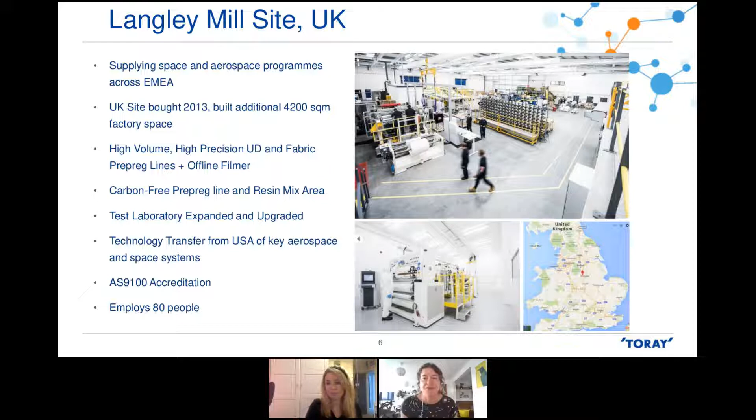We've now got everything that we need to supply into the industry, and we're actively supplying space programs across Europe. On spacecraft, we're the structure, and we supply raw materials to manufacture these parts. So solar array panel substrates, reflectors, there's a huge list here of parts which we supply, but basically with composites, you can get about a third weight saving over metallic parts.

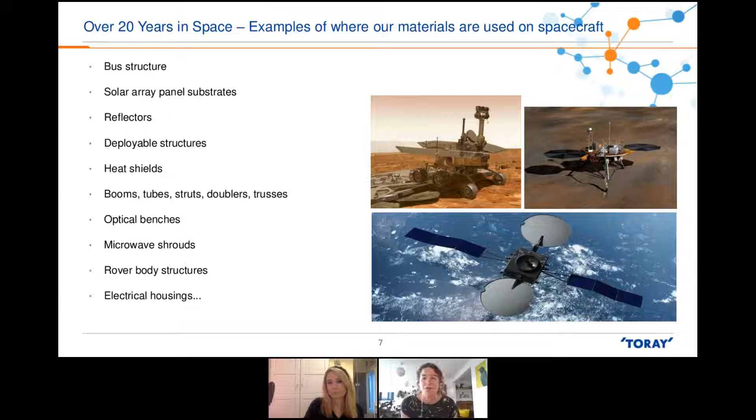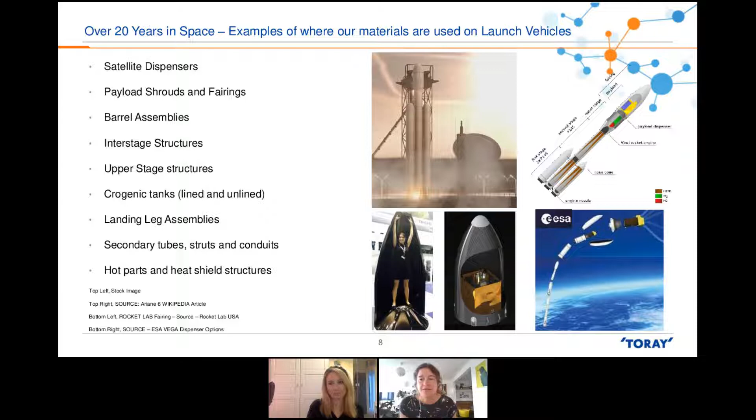And here are some examples of where we're used on launch vehicles, including a picture of me inside the Rocket Lab fairing. Their latest vehicle is substantially larger - I think they put a picture of themselves having dinner in it on their Twitter feed. So again, we're seeing growth in this area in small launch vehicles, and we're supplying to all the structural elements of these, including tanks for fuel like oxygen.

So what are the challenges of getting to space? Well, it's very high cost per kilo. As a rough value, it costs you about $10,000 US per kilo to get to geostationary orbit. On the small launch vehicles, they're still at a higher cost than the large launch vehicles, and they're going closer to the Earth, so to get to low Earth orbit costs you about $30,000 per kilogram. So you can see a weight saving is really worth it, even with quite exotic, expensive materials.

The biggest load that these materials ever see is on launch. Huge acoustic and vibrational loads generated on launch. Excepting, of course, if they're going to land on other planets, that's a whole other set of loads. And then you get temperature shocks, for example, when you're filling the fuel tanks on Earth. Once you're on orbit, you've got vacuum, you've got radiation, and more we're seeing requests for materials that are resistant to atomic oxygen, which is basically oxygen escaping from the Earth's atmosphere.

It's far more prevalent in low Earth orbit because you're closer to the Earth's atmosphere. There are also temperature extremes in space as you're going in and out of the sun's shadow, and it depends how far away you're going from the sun with your mission. So there's thermal management, of course, no convection because there's no air to help you there.

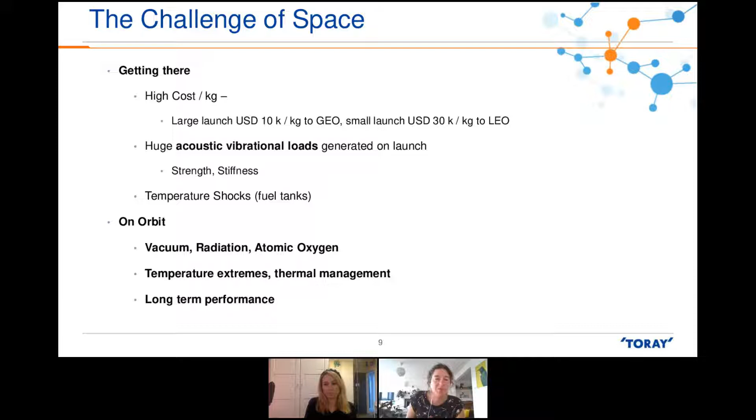And you want long-term performance. So for a geostationary orbit satellite, you're looking at performance for 15 years in space without a failure. So you really want to know that you've got a good material up there.

Which is of the solar array panel substrates for the JUICE mission going to Jupiter's icy moons. So that's 85 square meters of solar array panel, because it's quite a long way from the sun, so it's harder for it to generate power that far away. And it gets very cold out there. So it had to withstand temperature extremes, but also remain very stable as a structure, which is one of the advantages of composite materials, is you can get a very low coefficient of thermal expansion and coefficient of moisture expansion. So you're very confident about the dimensional stability of your product.

You also need low outgassing. So what happens in space is that low molecular weight compounds literally boil off from materials, and those can then condense on things like solar array panels, solar arrays, and reduce the efficiency of electrical equipment. So we carefully control our materials to make sure we know how much outgassing will happen and that it's sufficient for the mission.

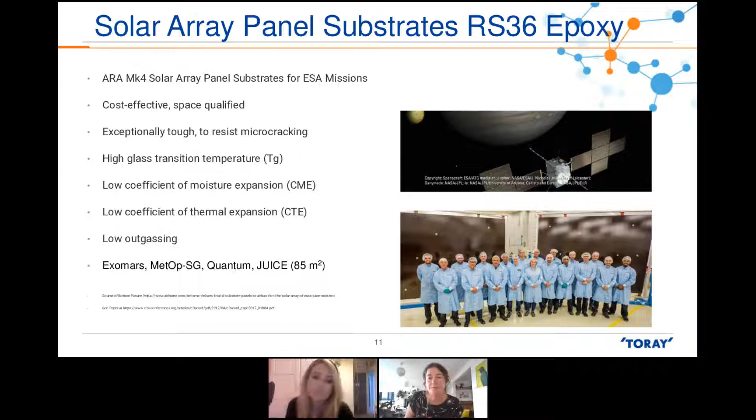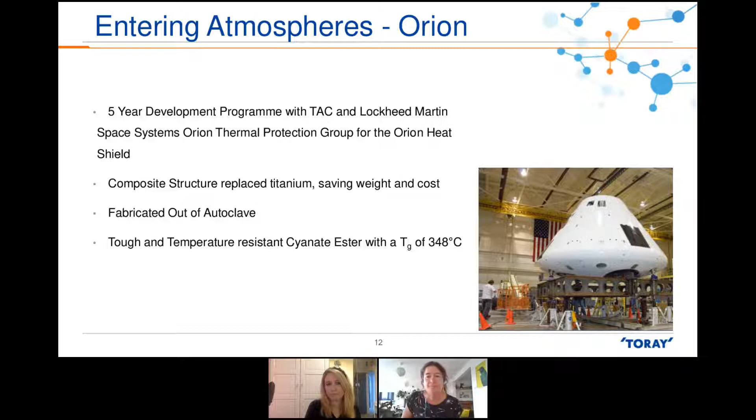Some of this work was funded by the European Space Agency, and they're now looking towards small launch and satellite structures with this type of application. And they are also supported by Airborne in the next stages of their program.

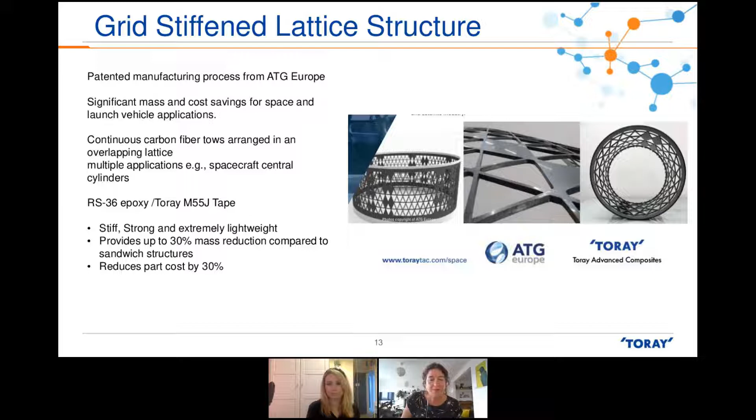And then you will have heard, if you're at all interested in space, about the constellations of satellites. What does that mean for us as an industry? Well, in the past, we've been slowly, carefully and methodically making larger composite parts. We now have to start to transition to making satellites not in 18 months or 2 years, but in a day or 2 days.

And so that means that in the composites industry, we have to move towards automation of parts. And later on in this session, you'll hear from Joe Summers, who has some great videos showing what Airborne is doing in this area to allow sort of mass manufacturing of small solar array panel substrates for satellite constellations.

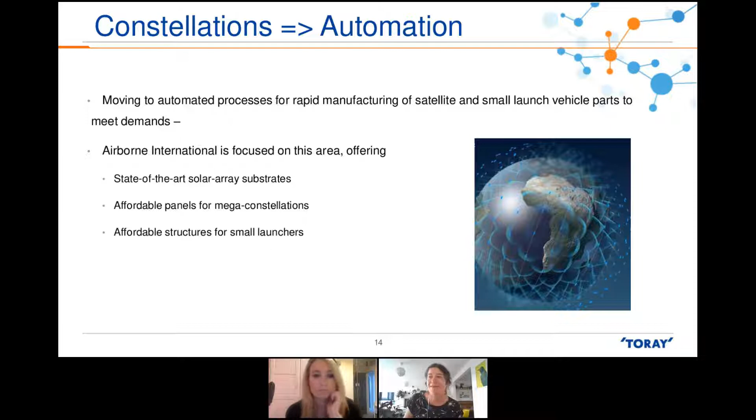And on smaller satellites, they still tend to be metallic in their framework. So potentially they will be composite in the future, but there's not enough weight saving there to move into that area yet.

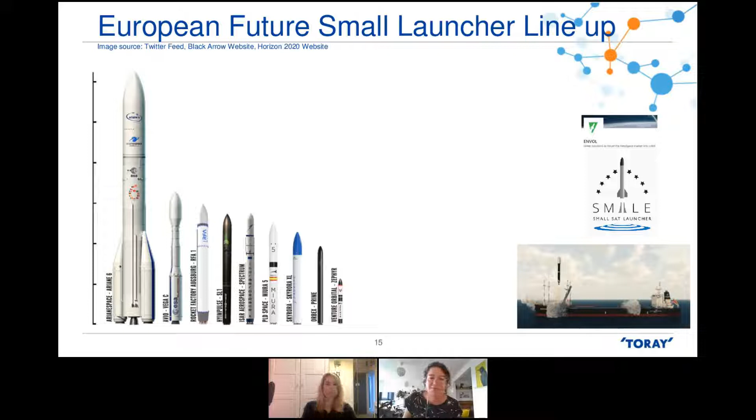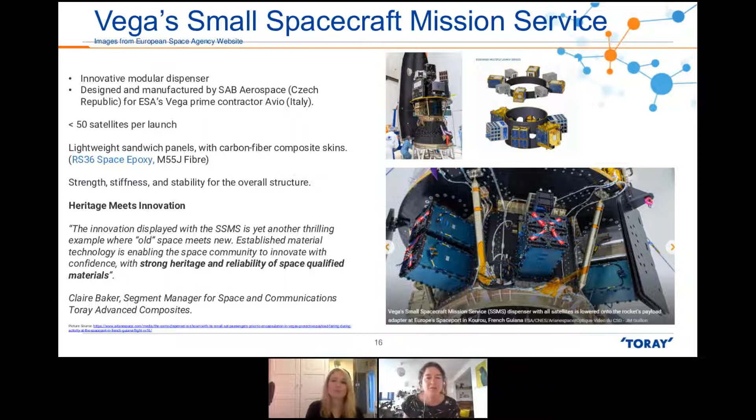The large geostationary orbit satellites have seen the market drop a bit in recent years, but there's still demand for those, though there are fewer of them and they're more powerful. The European Space Agency has done a great job through the pandemic continuing to release funds and support things like the continuation of the Copernicus missions. We're seeing constellations of small satellites, more deployable and stowable structures, so Amool will talk about those next, since that's an area where Oxford Space Systems specialises.

Debris is becoming an issue. How will we clear it up? How will we monitor it? What materials do we need to make sure things demise or burn up on re-entry? Flexible dispensers, drop-off vehicles, and launch vehicles with kicker stages which fly around dropping things off into different orbital slots.

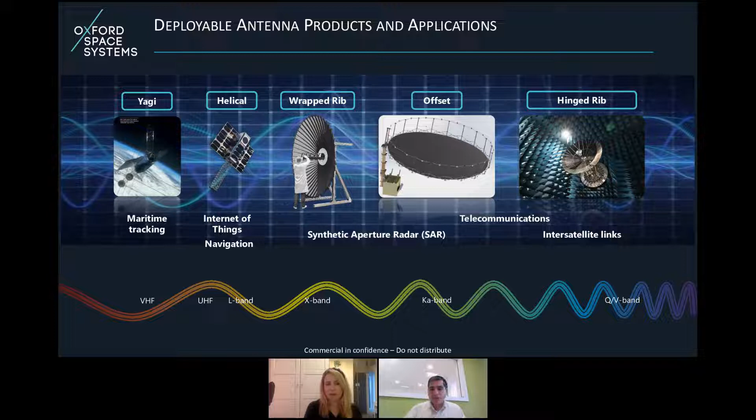So the innovation we have is not only trying to have these products stowed in a very small space, but also ensuring they are lightweight. The only way we could do this is through the use of advanced fiber-based materials, and I'm going to touch upon a couple of them as we go through this presentation. We've got several materials that we use, going from carbon to glass to aramid, Kevlar, ultra-high molecular weight polyethylene, to metallic yarns and filaments. I'm going to touch on the three critical ones we've used or relied on quite thoroughly through our product development: carbon, ultra-high molecular weight polyethylene, and metallic yarns or filaments.

So let's start off with carbon fiber itself. I know Claire's probably looking at this and saying, yeah, this is something I could do much better than Amool, and she would be right to do so. I'm just going to give you a very brief insight into how we start off from a polymer all the way to a finished product, because that gives you context into how these materials are developed and how we can use and tune them to our requirements. So we start off with the polymer, a simple granular powder-based solution, which is then put through a spinning process.

So you have a lot of additives, a lot of chemicals that go into it, something like dimethyl sulfoxide that is added to the base polymer. It's turned into a gooey sort of liquid, which is then wet spun into fibers. And then those fibers are taken, stabilized through a heating process. So you increase the temperature, oxidize them in air, and then carbonize them as you put them through an inert atmosphere, raising the temperature even higher.

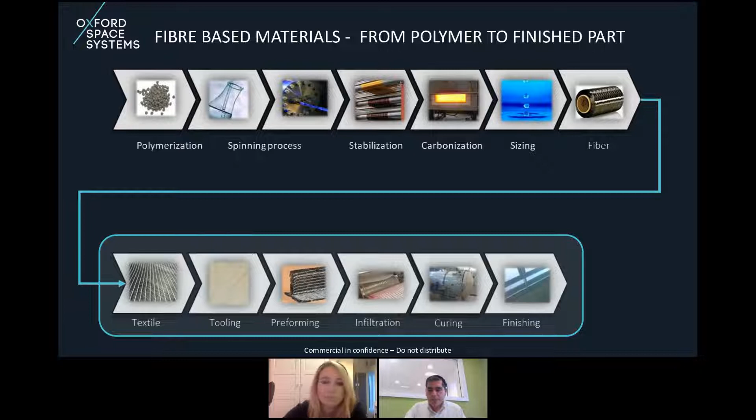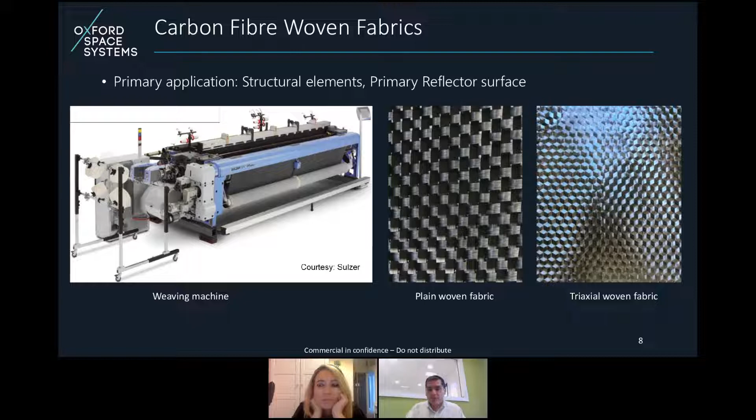Now, depending on the kind of properties you need, you could either have these materials used for structural elements, or if you're clever enough and know how to play around with the construction of the material, we've also successfully demonstrated the use of woven fabrics for primary reflector surfaces, something I'll touch upon towards the end of my presentation. Another form or process we could undertake is knitting.

So imagine having your sweater or your jumper suit, which goes through a standard knitting process. Well, we use that very technology to create knitted elements or knitted preforms that can then be transformed into either structural or non-structural elements, which become critical key components of our products.

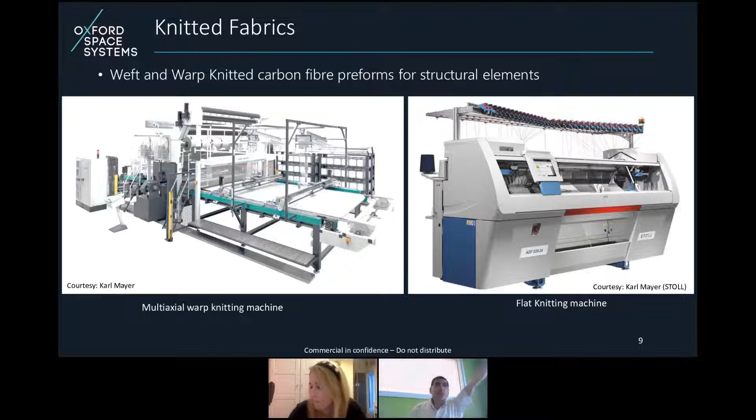So we do have an industrial facility here at Oxford Space Systems where we produce knitted structures for primary reflectors, and I'll touch upon that in just a little bit. So in the image that you see, we've got carbon fiber weft knitted structures that are energy absorption efficient.

So you can have a woven structure which gives you a lot of strength, but if you want something that can withstand impact, then you would go for a knitted structure. And by virtue of the construction, the architecture of the knit itself, that gives you an additional benefit for absorption of energy.

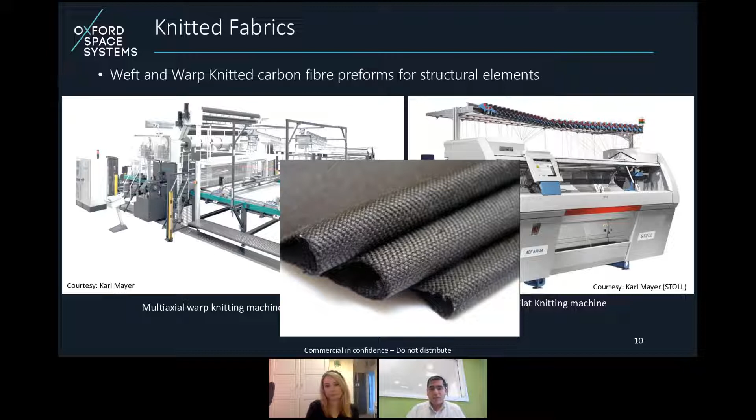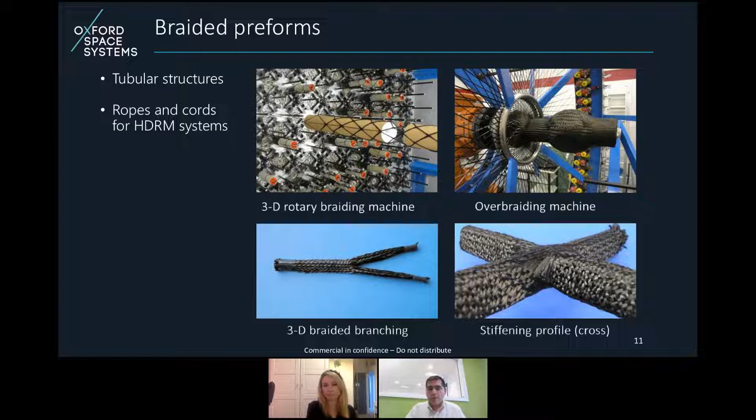So you could either have a V-shaped integral structure that roots into a base structure, or you could have stiffening profiles where you've still got an integral structure, but you don't have to have a specific joining technique at the edges or at the point of confluence.

In terms of plain fabrics, not everywhere—not in every application, as you heard Claire speak as well—can you use a woven or a knitted or a braided structure. There are applications, there are structural requirements where you would want to have the maximum strength of the fabric or the maximum strength of the fiber being used.

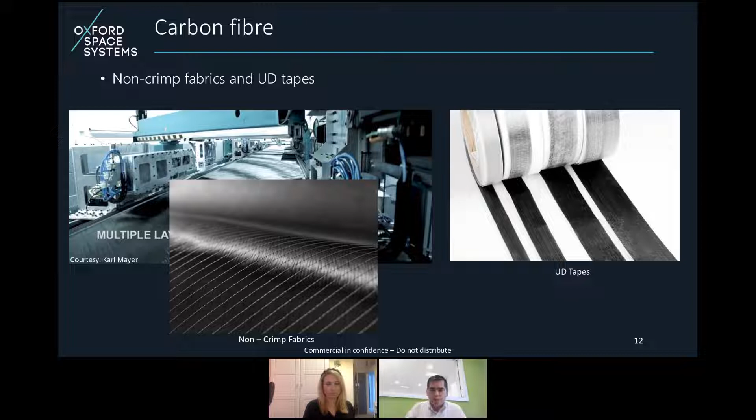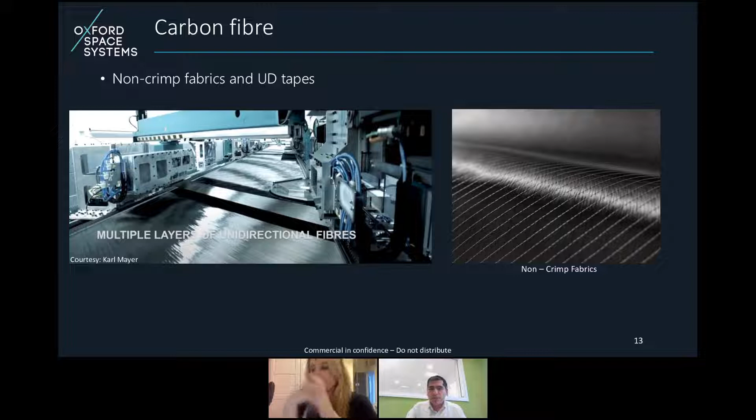And for those, we use elements like non-crimp fabrics or UD tapes. So the process shown here uses a multi-layered Max 5 Liba machine that produces non-crimp fabric. You could have multiple angles of unidirectional fabric laid on top of each other at a given angle requirement that you can prescribe, and we could use these quite smartly towards meeting our structural requirements.

Finally, going on to the ultra-high molecular weight polyethylene, this is a very different type of material. It's a polymer-based material, much different from your traditional carbon fiber, but we have found its use quite interestingly in HDRM systems, hold and release mechanisms.

What we've combined is a material along with a production process that gives you an excellent combination of the use of a filament, a fiber, where you can restrain an antenna, hold it in place just up until it gets into space, and then through use of either a thermal knife or another means of severing this cord, you can cut this fiber or rope and deploy the antenna.

The interesting thing about the ultra-high molecular weight polyethylene, such as Dyneema for example, and there are several others, you've got Vectran and a list of them, is that they have really good creep lifetime. So you can stow your antenna for a long period of time before you deploy it, and be sure that it's going to deploy just fine.

The last bit in terms of materials is the use of metallic yarns. Again, we rely back on traditional textile processes, and we take these very fine yarns, very fine materials that are then knitted through either a warp knitting process or a weft knitting process.

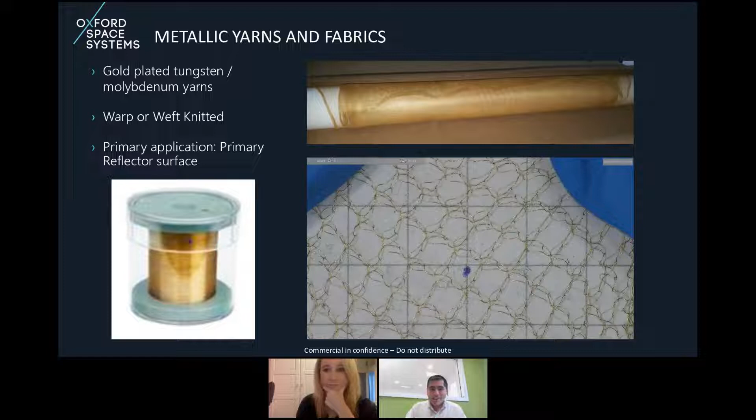These are flexible structures that can be wound into a very small volume, and then they are deployed, basically relying on the strain energy of the material itself for it to deploy into space. The black fabric that you see on top is just a representative fabric. That indeed is the metal mesh, which again is produced as a textile structure, but it is used as a primary reflector in our case.

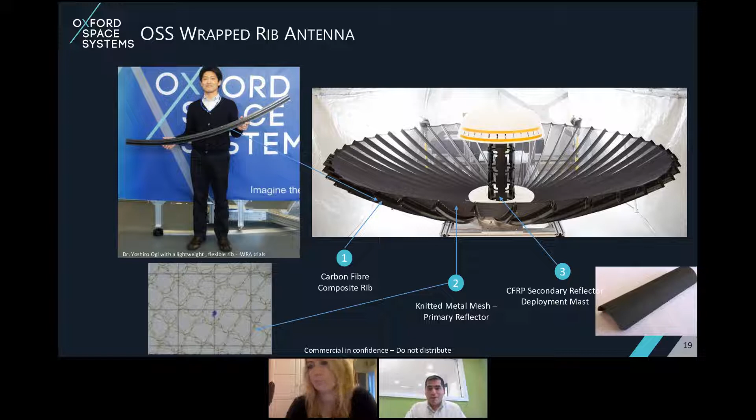And then we've got the secondary deployment mast, which again is a cleverly produced carbon fiber-based structure where we can mix and match the way we layer up different unidirectional woven and braided structures in order to create a self-deploying structure.

Very similar on the offset reflectors. I think the critical one that you see on the left-hand side in the image, this is roughly a 3-meter diameter reflector surface, made out of a carbon fiber reinforced silicone-based structure. So we've come up with a method of producing a flexible membrane that can be folded and unfolded, and it retains its shape once it's put in orbit.

And this gives us excellent properties, and at the same time you can store it down into a very small volume. It's extremely lightweight and performance is just excellent.

Apart from that, we use carbon fiber for the boom structure. Again, it gives you the advantage of lightweight, and the advantage of collapsing it down into a very small volume and retaining it as we go forward.

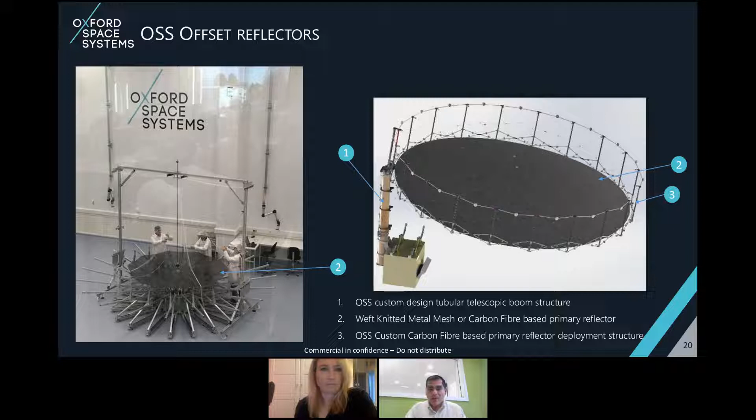And last but not least, we've got our hinge rib antennas, where again we use a combination of either the metal mesh or the carbon fiber membrane. We can go up from C-band operation for something as low as 4 gigahertz of frequency operation all the way to up to 40 gigahertz. And these have been tried, tested, proven, and going through the final stages of qualification before we put them into space.

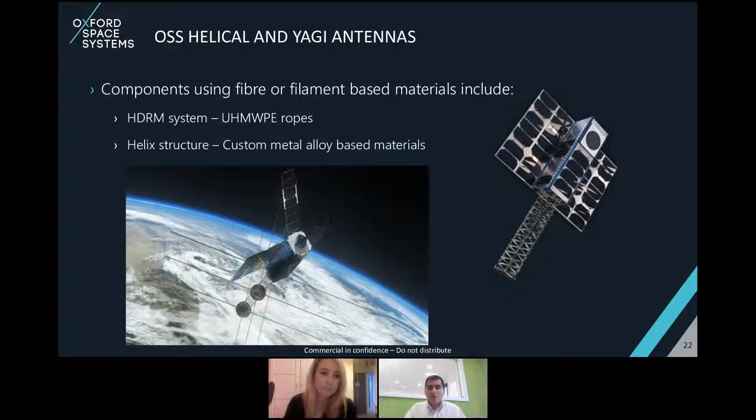So as I said, we have a lot that's currently being developed, a lot that smartly uses fiber-based materials, whether it's for the HDRM systems and the helical antennas, or the ribs for the wrapped rib antenna, or the main surface for the offset reflectors. The critical fact is that the choice of material and the choice of production process defines how we use these materials to our advantage.

And finally, it's not just all show and tell. We do have a lot of heritage of putting these materials into space. We've had 6 major deployments. You're welcome to look up these names.

The AstroTube was one of the quickest, longest retractable nanosat boom systems ever placed into space. We believe we hold the record even today for the fastest time from concept to orbit, just under 18 months. We created a system which was deployed, and we have lots of helical antennas, one of which was the latest, launched just a few weeks ago, and we're hoping for a successful deployment in the next couple of days.

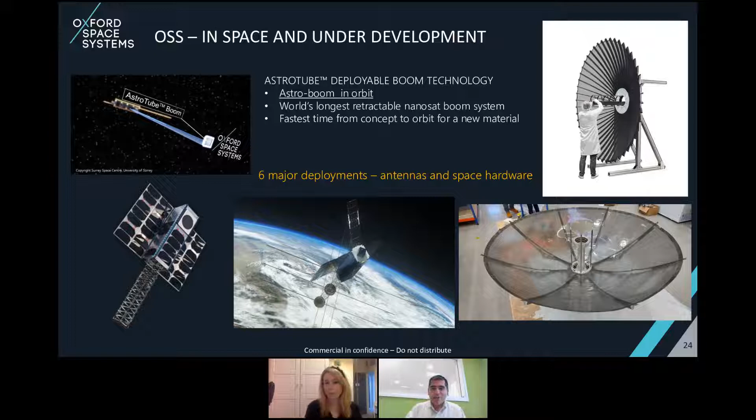So that's where we are. As I said, advanced materials play a very critical role in what we do. It's not just from the lightweight perspective, but also the lifetime, the operability, the storability, the cost. It makes it extremely efficient through clever engineering and production techniques. You can come up with systems, and here at Oxford Space Systems we've definitely developed systems that make use of these advanced materials to the fullest.

So that's it from me. Sarah, back to you. Thank you, Amool, that was a fantastic presentation.

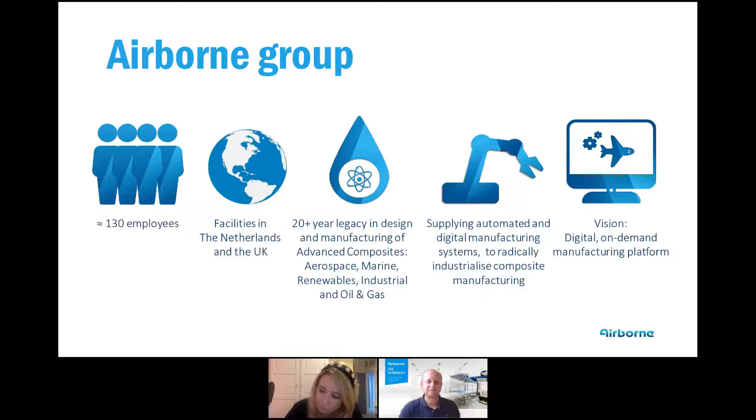It's true of the composites business, the automation business, and us in the UK. We combine composites know-how—I think it's pretty difficult to get away from needing expertise in composites—with the mechatronics side, the automation side, and the software engineering.

I have a couple of videos which I'll show you at the end. They describe better than I can what our vision is for a smart automated factory for producing anything—in this context, space components. Our philosophy is applying these three themes to achieve that cost-effective solution for composites.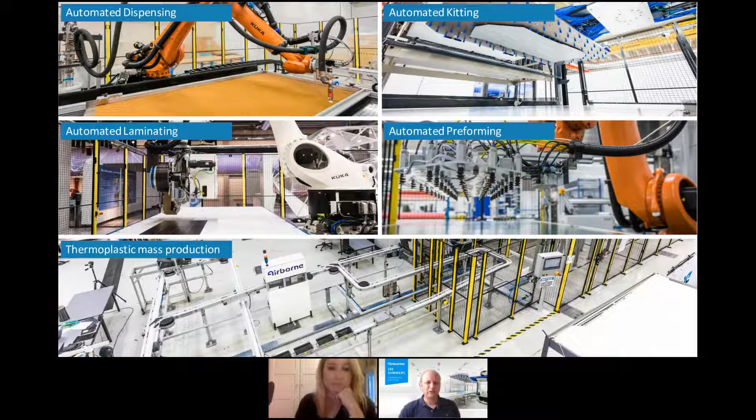Here are a couple of the automation cells we apply and use to produce composite structures. Composites are, unfortunately, today quite a wasteful process in many contexts. The buy-to-fly ratio, if you call it that, is not particularly good. A lot of material ends up on the cutting floor as waste or lack of useful materials. Our goal is not only to automate in the sense of improving productivity and reducing labor, but to minimize production waste.

So you have a variety of manufacturing cells here that are either automatically dispensing resin—typically 40% of resin in a potting process never gets to the part, in this case that's considerably lower—or our systems for automated kitting, which often save 10 to 20% of materials from gross usage.

So yes, there's economic benefits. There's also sustainability benefits. And finally, we hope in the end the composite structures we've produced are more cost effective as a result.

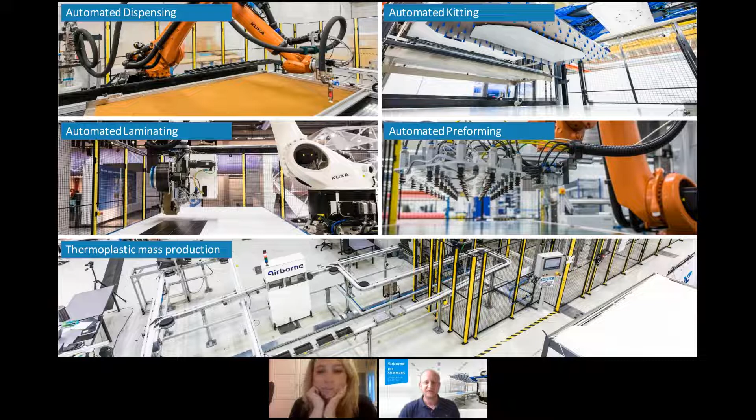To eventually make our way back onto space, which I know is what people are here to listen to—these are the products that Airborne is working on. We are the market leader for substrate panels. We've seen a few examples already from Claire, where we produce panels with extremely high stiffness for mounting solar panels, and some very interesting missions we've been involved with in that respect.

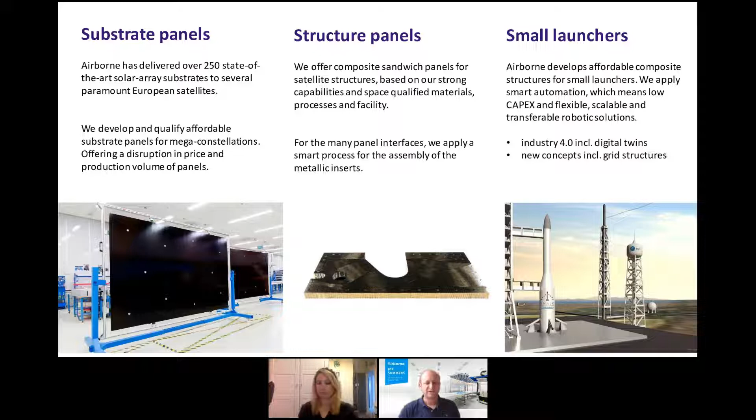Also structure panels for satellite structures, and a variety of programs in the small launcher space, where again new paradigms and new requirements for cost-effective, higher-rate structures are needed, and we're internally applying our own automation capability to make that viable.

Just a quick word—we help clients quite considerably, not just supplying components or a machine, but as well described by Amool and Claire, designing a composite structure is a series of trade-offs between the economic requirements, the functional requirements, and the chosen manufacturing technology. That's a journey which is not that easy to navigate. So Airborne also supports clients in choosing the right materials for their structures, the right automation solutions, and the right compromises in designing new composite structures.

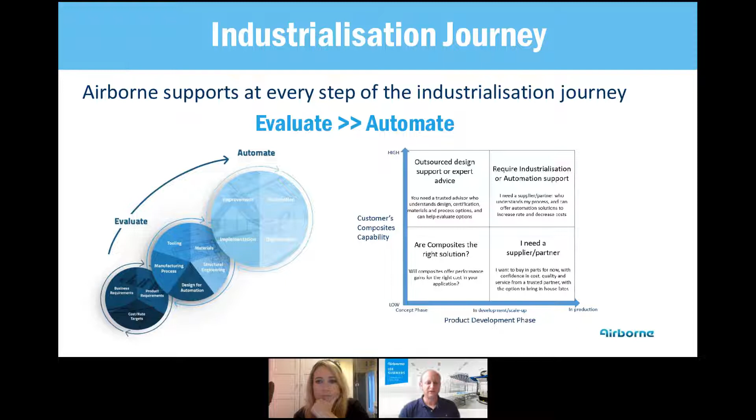So if I can, hopefully someone will present the video, which will give a much better explanation than me—Airborne's. New space is starting a movement of change.

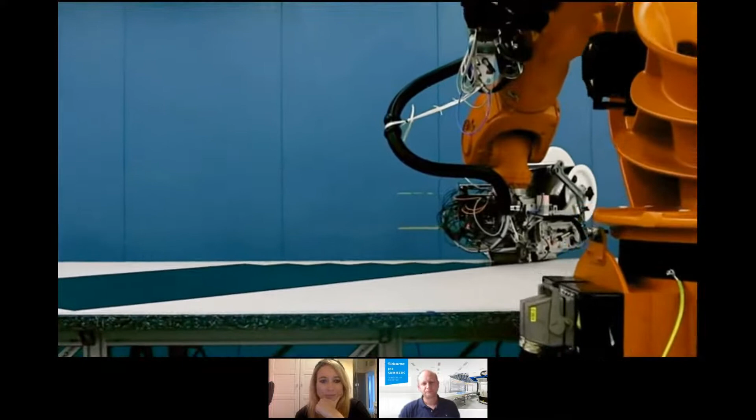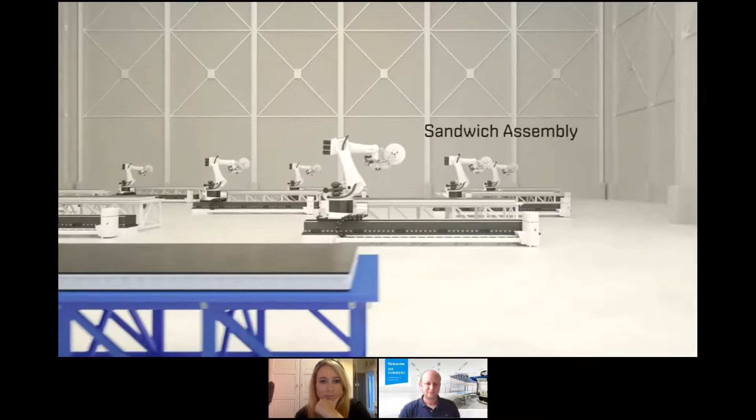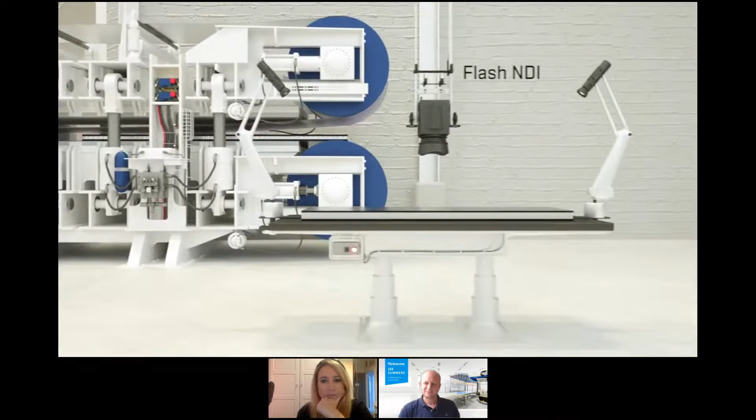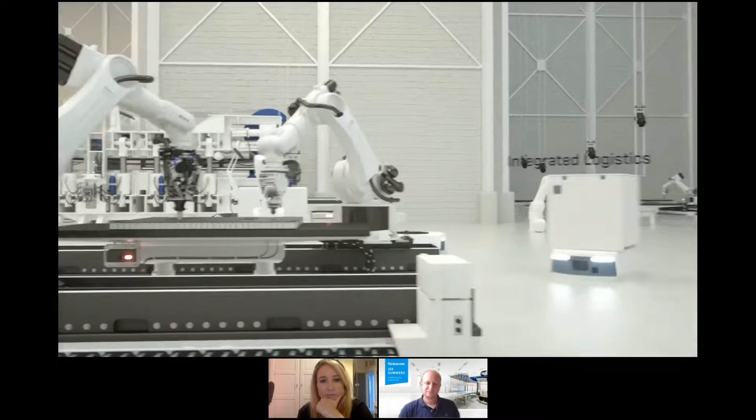The commercialization of space requires drastic cost reduction in spacecraft manufacturing and unprecedented production volume. Airborne believes that design-to-cost and process automation are key to meeting market demands. Sandwich panel manufacturing is our core business. This enables us to redefine the process and cut down to a fraction of the cost. We do this by applying disruptive technologies for panel laydown, curing, machining, and inspection with integrated logistics, and by panel manufacturing on highly automated production lines, assuring a robust process with stable quality and high throughput.

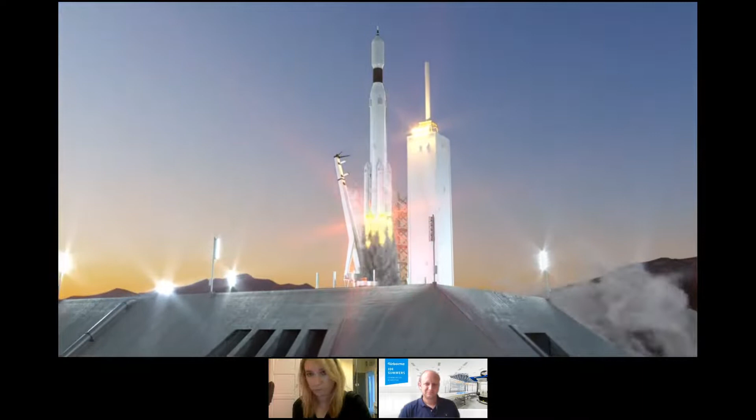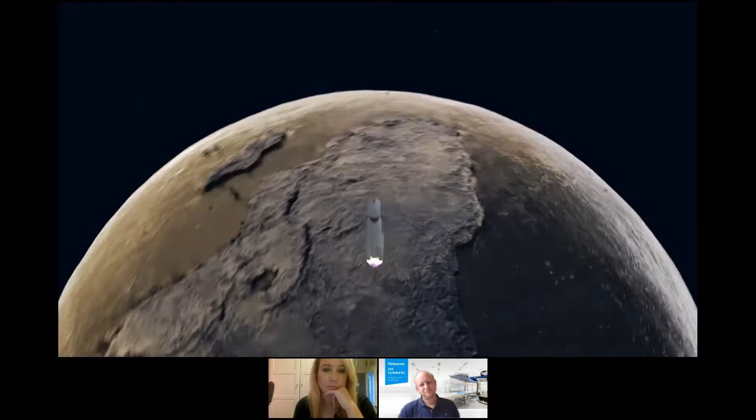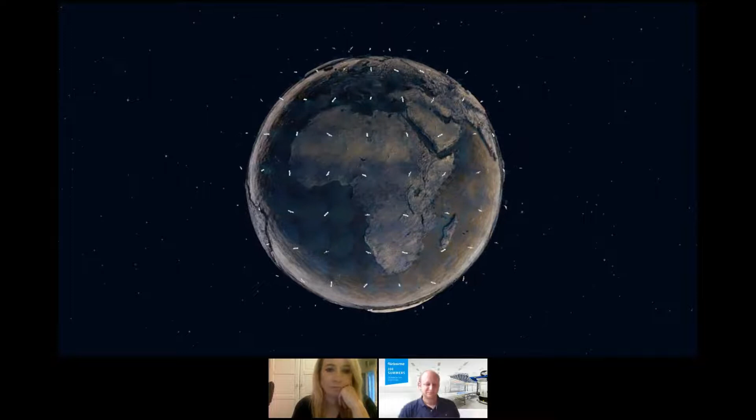Mega constellations will catalyze the accessibility of space. Airborne is committed to being your partner in enabling the business case for affordable satellite constellations. Connect the world. Connect to Airborne.

There we go. So I should have just played that at the beginning and kept quiet myself, shouldn't I? There's the vision, and we've got a second video which we're just going to show you—it's Airborne in 90 seconds.

And so while you've seen the CGI vision, we now have some more real practical examples of how we're deploying this technology into real space structures. If we could go for the second video.

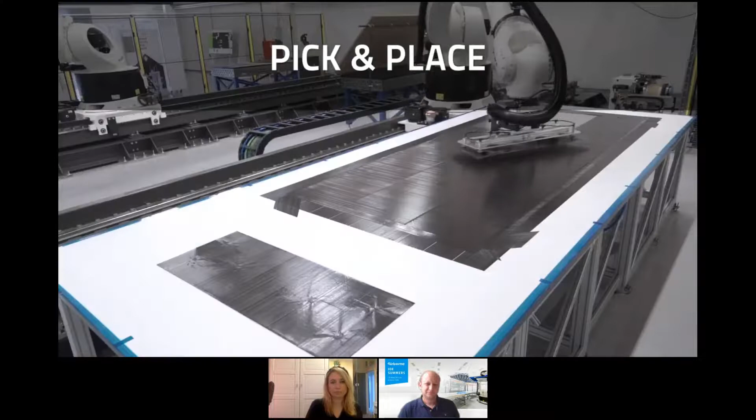There we are. So if you're a fan of composites and driving Euro pop music, then that will be the video for you.

That brings me to the end of the presentation. I hope I've given you a flavour of what we do at Airborne. And back to you, Sarah.